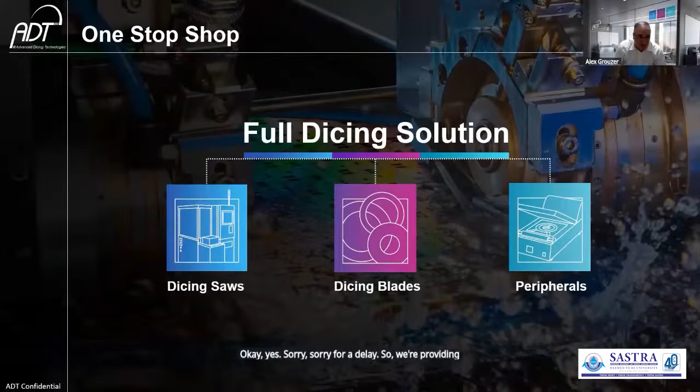Advanced Dicing Technologies, we call it ADT, is a world-leading manufacturer of comprehensive solutions for composite dicing applications. Within over 50 years, few decades, ADT serves the semiconductors, microelectronics, and optical components industries. We're providing full dicing solutions, manufacturing dicing saws, dicing blades, and peripherals.

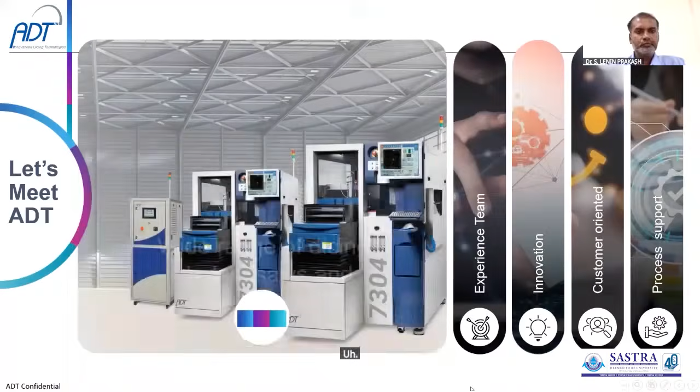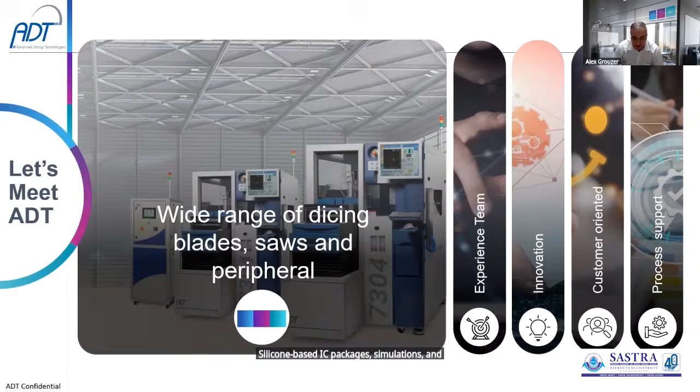Let's meet ADT, who we are. ADT is specialized in the development and manufacture of dicing blades, saws, and peripherals for a wide variety of applications: silicon-based IC, packages, singulations, and hard materials microelectronics components. We have knowledge of more than over 50 years, formerly based on K&S that lived in Israel, and after that ADT was established in 2003. So we have vast experience in dicing technology, building dicing machines, dicers, and peripheral devices, as well as dicing diamond blades.

We are not a huge company. What I'm proud to say is that ADT is a company where innovation never stops. We provide tailor-made solutions according to customer requests. We are a very adjustable company, so we have a lot of solutions for different applications around the world. I call our company a tailor-made company, tailor-made solutions. We are 100% customer-oriented. We can hear our customers and provide our own solutions for that. ADT is a one-stop shop with end-to-end research, development, and production held in the company's advanced ISO 9000 and 14000 environment-certified facilities.

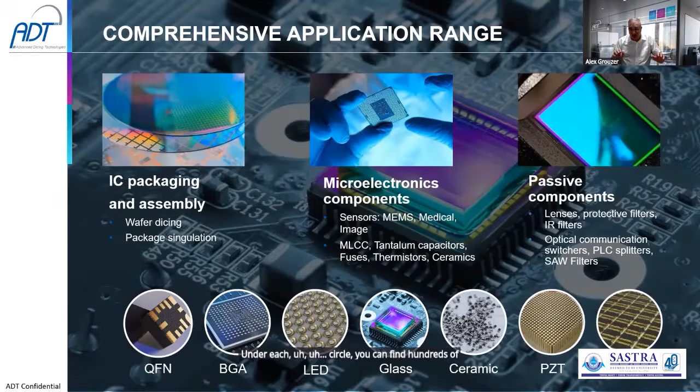Comprehensive application solutions. We are focusing on packaging and assembly materials, wafer dicing, package singulation, microelectronics components like sensors, medical image details, MLCC, tantalum capacitors, fuses, ceramics, etc. So passive components like lenses, IR filters, and all optical components and filters. Here in the line, you can see just a few samples of substrates which we are specialized in dicing there: QFN, BGA, LED, glass, ceramics, PZT, PCB. So under each circle, you can find hundreds of applications and hundreds of solutions with our own solutions.

ADT dicing saw lines offer a variety of capabilities, configurations, and levels of automation, as well as unique solutions for special materials and applications. The dicing saw range includes automatic saws, fully automatic saws with single and double spindles, as well as special machines for tailor-made applications.

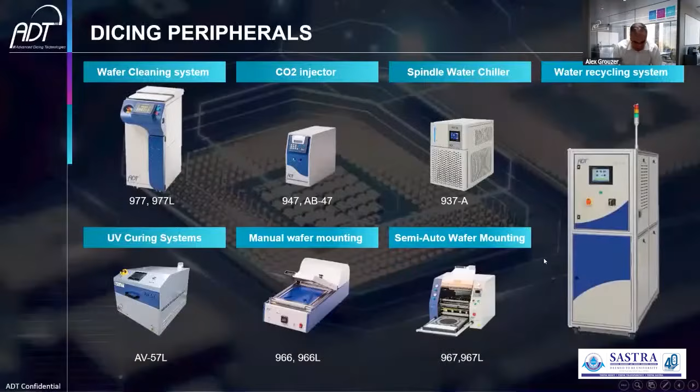About dicing peripherals: ADT offers dicing peripheral equipment and accessories such as wafer cleaning systems, water recycling systems, spindle water chillers, semi-auto wafer mounting, and more. All peripheral devices are part of the dicing process. It's very important to find suitable equipment for dicing. Finally, you get the components which we need to cut, but all the equipment shown here supports the process.

And dicing blades. ADT's high quality diamond dicing blade range includes resin blades, metal sinter blades, nickel blades, and hub blades. So we have 4 main lines. Supporting ever-growing customer requirements, ADT blades are the perfect dicing solution for various materials and substrates such as QFN, BGA, ceramic, glass, quartz, etc., and for other tailor-made solutions for challenging materials and applications.

We have two main divisions at our facility in Israel, for equipment and for blades. I represent dicing consumables, and just to finalize, I want to show you a short movie about ADT, which we present around the world at exhibitions. Please see the movie.

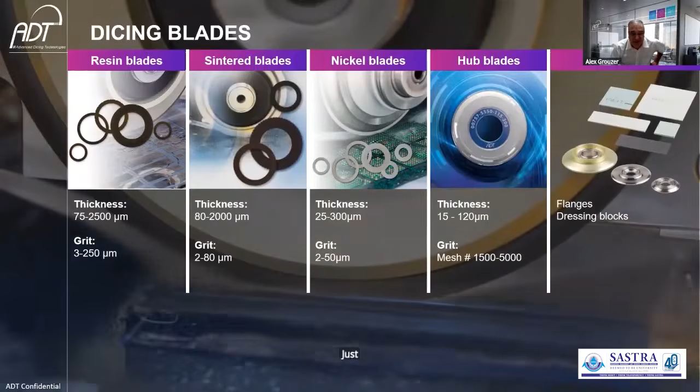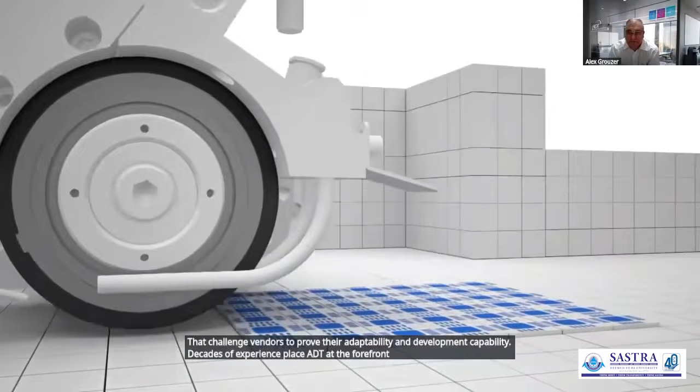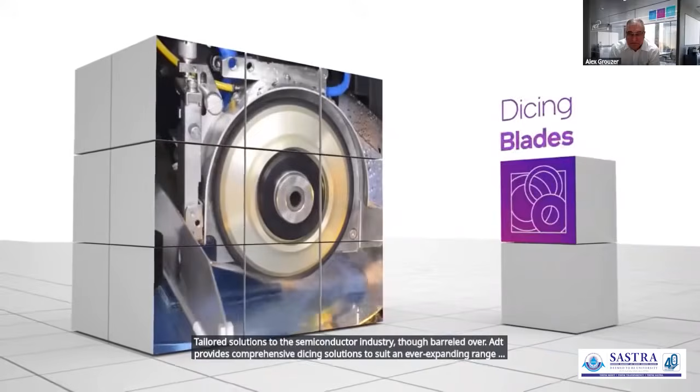We live in a world of constant evolution that challenges vendors to prove their adaptability and development capability. Decades of experience place ADT at the forefront of global high tech, providing unique, tailored solutions to the semiconductor industry the world over. ADT provides comprehensive dicing solutions to suit an ever-expanding range of customer requirements. ADT's international headquarters in northern Israel is the site of our two main production facilities, as well as the home of our global marketing, sales, logistics, R&D, and maintenance and technical support team. Complementing these teams are regional sales and technical support offices in Taiwan, the Philippines, and on the east and west coasts of the United States, as well as a worldwide network of sales agents, representatives, and distributors in the United States, Europe, and Asia. ADT, Advanced Dicing Technologies.

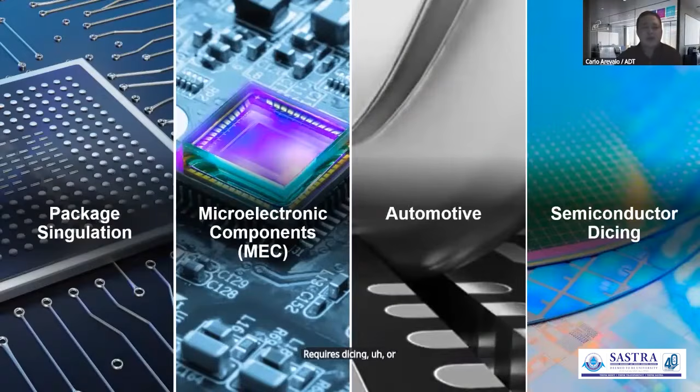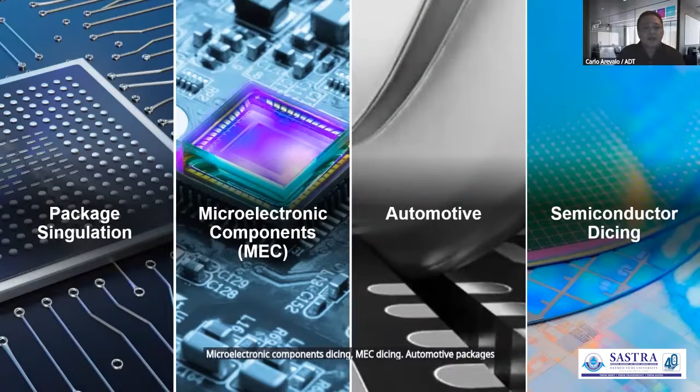Continuing from what Alex mentioned earlier, I would like to talk to you about the different applications and the different packages that require diamond dicing blades in semiconductor or MEC manufacturing. These are the four major processes or applications that require dicing blades and equipment: package singulation, microelectronic components dicing or MEC dicing, automotive packages dicing, and semiconductor dicing.

Okay, talking about package singulation, there are basically about 4 major volume runners currently in the industry of semiconductors or MEC assembly. That would be QFN, BGA, LTCC, and LED packaging.

Let's talk about QFN. QFN being a packaging consisting of a molded copper lead frame. This material is somehow very unique because it's a combination of two distinct opposite materials. Copper lead frame being a very ductile or very malleable material, combining it with a very brittle epoxy compound, then there are a few challenges that are required from the blade or from the dicing process.

Some of the things that are giving challenges to this particular package is the plating of each of the QFN packaging. There is specifically tin plating in the process, or also nickel palladium plating, which is giving so much problems to the blade. So it's very important to have the right amount of balance of wearing of the blade to provide good quality and to provide a significant amount of blade life.

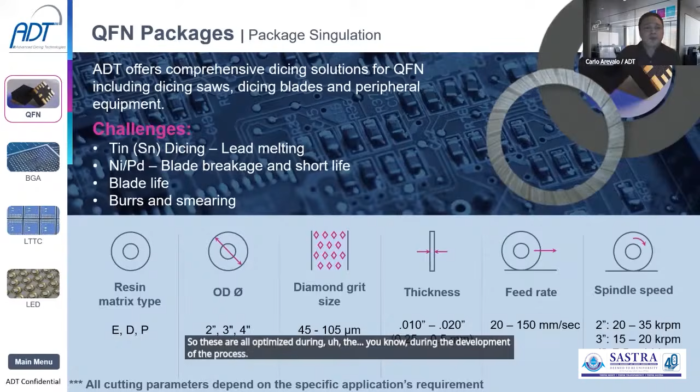Next to QFN is BGA. This is mainly molded PCB, so it's considerably a soft substrate. So the main challenge is to have a blade that would be able to deliver a long blade life. To achieve such a long blade life, you need to maintain the thickness of the blade, or what they call the lateral wear of the blade, to have a good balance with the radial wear. That would maintain the package size during the package singulation.

And another thing is the chippings, because PCB copper traces are very susceptible to peel-offs. So the optimal grit size and a combination of a lot of blade parameters is important to come up with the best matrix or the best formulation.

For this particular application of BGA packages, ADT has a few models also, but it's mainly concentrated on the metal sintered blade. The OD can range from all sizes, from 2, 3, 4, and 5. Diamond grit size from 20 to 70. Thickness range of 100 to as thick as 2 mm is also available.

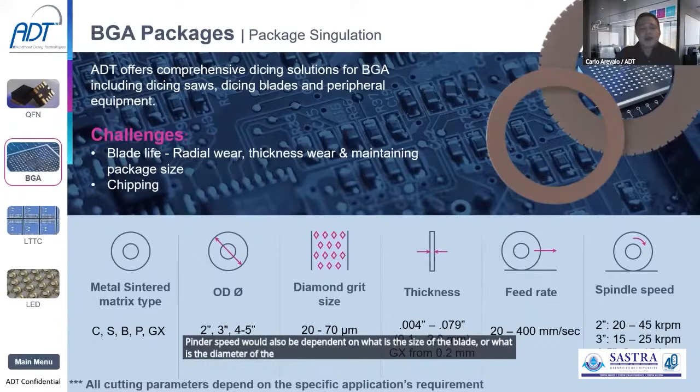Still within the BGA packaging, there's another blade that we are also serving the market with. We call this the Novus blade. This blade in particular is a very durable blade. This was developed to be strong, to be very stiff, and to reduce the risk of breakages and bendings.

So the main importance of this blade is to support high-speed cutting, even if you require a very long exposure of the blade, I mean the length of the blade. If you require a very long exposure, meaning that you're cutting a thick package, and the requirement is to cut it at a very high speed, then this blade was developed mainly to serve those kinds of challenges.

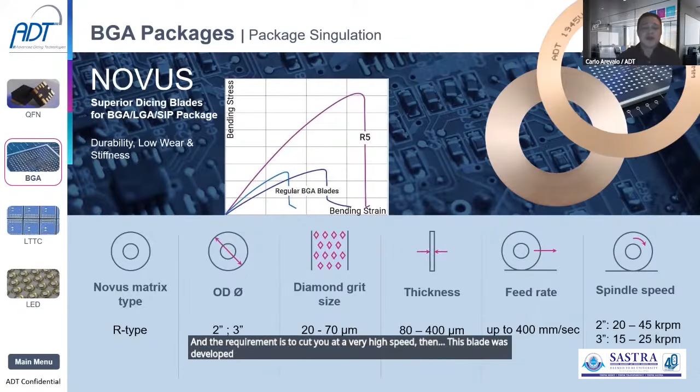Another blade that is also popular, or also one of our special blades in the market, is the S blade. This blade is a combination of maintaining the wear or the shape of the blade while being able to resist loading. The perfect formulation for this blade is to have a balance of lateral and radial wear.

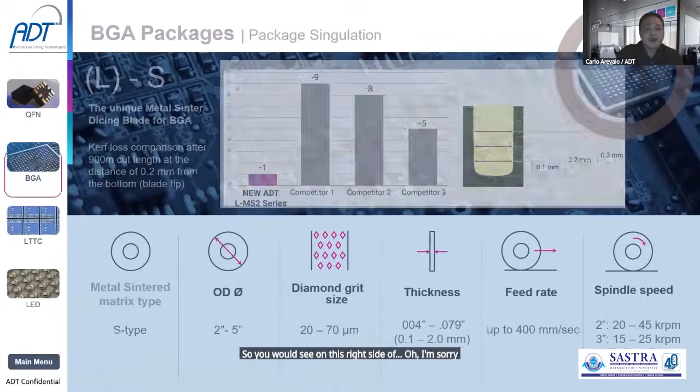So you would see on the right side of this drawing that as the blade is wearing, the profile would have very insignificant change. So this is what you want to maintain in order for your package size to be within the specs or within tolerance, because the main failure for BGA blade applications is the package size going out of spec.

So this S blade also comes in different OD sizes, from 2 to 5 inches. The diamond ranges from 20 to 70 micron. A thickness range of 100 micron to 2 mm is also available. And this blade is expected to run at very high speed, at 400 millimeters per second. The spindle speed will also be dependent on the application, the equipment being used, or the blade OD.

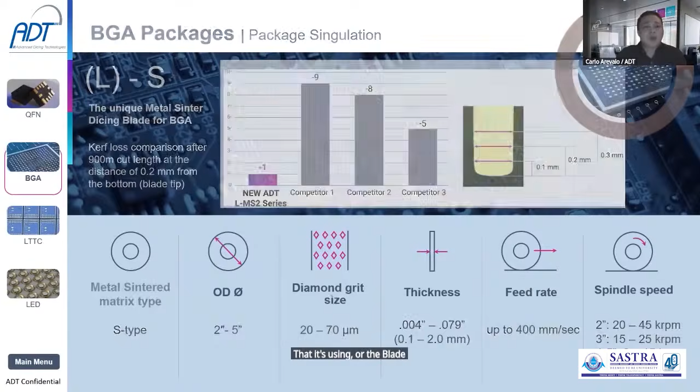Next to BGA application is HTCC or LTCC. These are high and low temperature co-fired ceramic substrates fabricated by laminating individual unfired tapes with printed conductor lines on the surface on top of each other and firing them together in a single step. The main difference between these two types of ceramics is HTCC being more brittle or harder because it's mainly alumina,

but the LTCC is a mixture of alumina and glass. So the challenges for this particular ceramic dicing are mainly concentrated on the chipping, because ceramic is a very brittle and very chippy material. This can cause a lot of chipping if you are not able to optimize your blade parameters or your process parameters. Another issue would be cracks or metal burrs, because this is the natural behavior of the ceramic. It could crack from the top, and also at the bottom.

And also package size, because when you are using a blade to dice a hard material, you're going to lose the side profile or the side thickness of the blade, and it can create an odd shape, and this can cause failure of the package size. So for this particular hard material, normally the recommendation would be using a resin blade because it's a soft blade. ADT has a few models like Q, K, and C matrix.

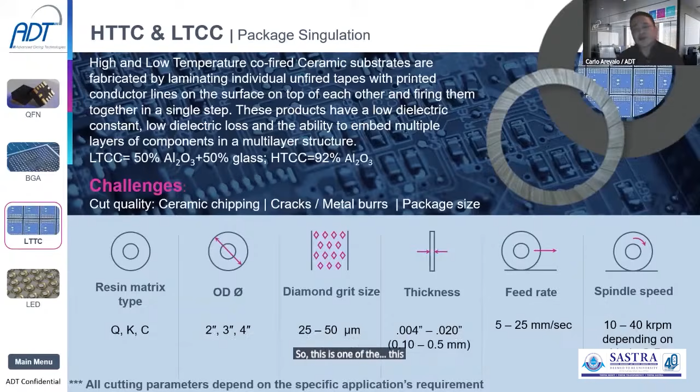The OD sizes range from 2, 3, or 4 inches. Diamond grit sizes from 25 to 50. Thickness range from 100 to 500 micron. The feed rate is relatively slow because of the application in ceramic, so it could range only from 5 to as fast as 25 millimeters per second. And spindle speed, depending on what blade you are using, will range from 10 to 40. So this is one of the few challenging applications for blades, ceramic materials.

And next, more popular in the market, is LED packaging. LED packaging usually consists of a base substrate upon which the LEDs are mounted. There are a few common base substrates used in the market: ceramic, PCB, and a molded lead frame is also a popular substrate. One of the challenges we face on this packaging is chipping, because if it's on a ceramic substrate, it will be very susceptible to chipping.

Another thing is cracks, which is also related to a harder type of substrate. Copper burrs, and die size stability, which would be related to how the blade is wearing. If you are losing your thickness, the die size will definitely change. And low blade wear. The customers or the market always expect that you deliver very good blade wear and are able to maintain a significant amount of cost.

So in general, for this particular packaging, the recommendation could either be to use a hard nickel blade when you are using a soft base substrate, or a soft resin blade if the substrate is a hard base substrate.

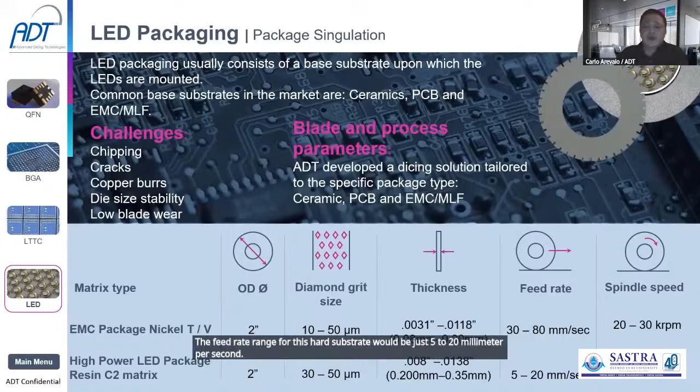When you're dicing a hard LED base substrate, you're going to use a resin soft blade. The diamond grit range will be similar, 30 to 50 micron. Thickness would be within 200 to 350 micron. But if you're cutting a hard base substrate with a resin blade, feed rates are going to be slower than usual. So the feed rate range for this hard substrate would be just 5 to 20 millimeters per second. Spindle speed would be within 20 to 30K RPM.

Then, after the packaging that we discussed for microelectronic components or MEC dicing, there are also a few popular applications or popular materials that require a blade and a dicing process. Those are mainly glass, ceramic, alumina, MLCC, PZT for medical devices, PCB, or SAW devices.

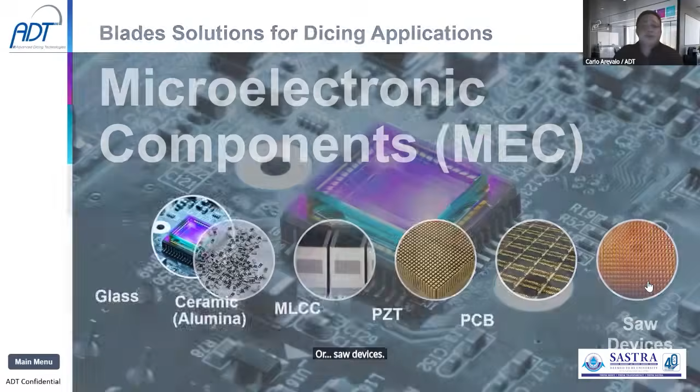If you're dealing with a glass substrate or a glass material, it's a hard and brittle material. There are a lot of applications it's used for: MEMS, biotech, IC or semiconductors, or optical devices as well. So the challenges when you're dealing with a glass substrate are definitely chippings again, top and backside chippings. Cracks are also a possibility because you're dealing with a hard and brittle material. When your material is hard, your blade life or tool life will be low. So this is another challenge: the market is expecting the blade to deliver a good amount of blade life.

Another thing is cut perpendicularity. You need to maintain the straightness. Cut perpendicularity refers to the straightness of the cut line that you make. So for a glass substrate, you have to maintain a very straight line. There are specs for the perpendicularity as well. And in some applications, there are also specs for the cut finish, how smooth or how rough you're leaving the cut line.

So there are two types of blades that are recommended for glass. You could do it with a resin blade, or you could also do it with a sintered metal blade. The grit size would range from 10 to 88 micron, or 10 to 70 if you're using a sintered blade. The thickness range for the resin would be from 75 to 500 micron, and you can go thicker because a sintered blade can support a thicker blade. So if you're using a sintered blade, it's 100 micron to 2 mm.

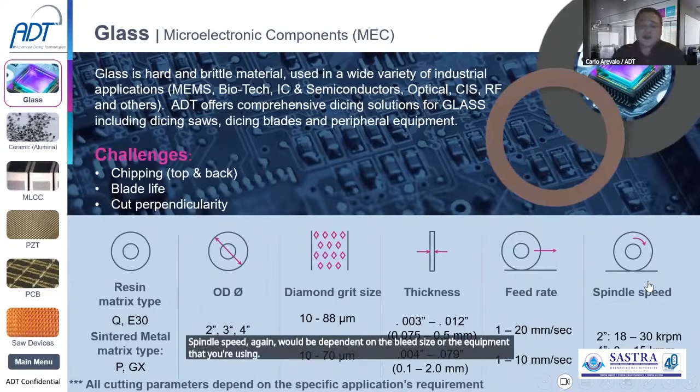But the feed rate is relatively on the low side for these two types of blades. You have a slightly faster feed rate if you're cutting with a resin blade, at 20 mm per second, compared to the sintered blade, which limits you to 10 mm per second. Spindle speed, again, would be dependent on the blade size or the equipment that you're using. So this is also something that needs to be developed.

For MEC, there's similar ceramic and alumina for MEC components, I mean dicing MEC. So it's similar to what I mentioned earlier. You're still dealing with a ceramic or an alumina, a very hard and brittle material. So the same challenges would still face you: chippings, cut straightness or perpendicularity, and short blade life. All three of these need to be optimized or considered in order to define the best blade matrix or formulation. For this type of material, we can use either a resin or a sintered blade, depending on the expected quality outcome.

The OD size can be 2, 3, or 4 inches. For the resin, the diamond grit range can be from 30 to 88 micron. If you're using a sintered, it can be from 10 to 70. Thickness range would be from 100 to 300 micron for the resin, and 100 micron to 2 mm for the sintered blade type. Again, it's similar to what I've shown you earlier. For the cutting feed rate, you would have a slightly faster feed rate using a resin blade, but still relatively low, since the speed can only go up to 20 mm per second. Spindle speed, again, is relative to the blade size and the machine that you're going to dice with.

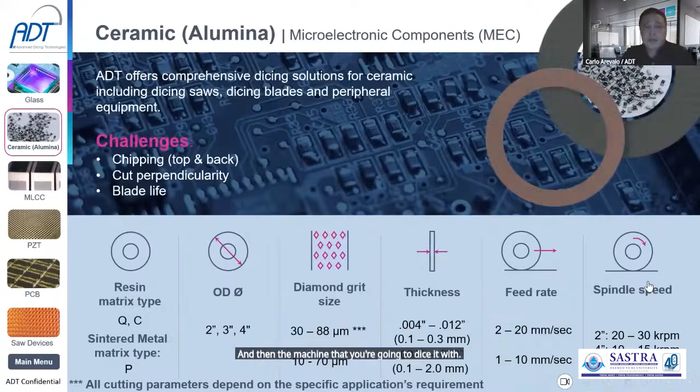Next to the MEC application is MLCC, or what they call the green ceramic. This is a multi-layer, basically a capacitor consisting of two conducting electrodes separated by an insulating dielectric material. Multi-layer ceramic capacitors consist of a large number of closely spaced parallel electrodes within thin layers of high capacitance ceramic material. For the green ceramic, the common application is dry dicing, so there's no coolant or water used during the dicing process. Without this water or coolant, you're dealing with a lot of dicing dust or material dust during the process, and this causes a lot of issues.

This is one of the challenges if you're going to deal with this kind of packaging. Blade clogging is also common because you're not flushing away the waste materials during dicing, and it's going to load up on the blade. It can clog your blade, and it can load up your blade. So when you have a loaded blade or a clogged blade, you would have poor quality in terms of smearing, or if the smearing gets much worse, it can also lead to lead shorting. So these are the few challenges that need to be looked at.

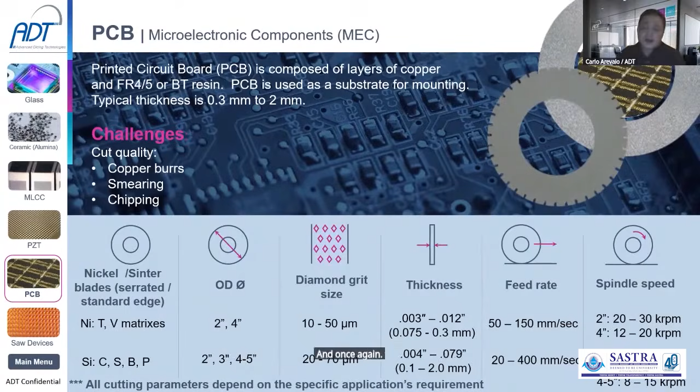And feed rate, since this is a sinter blade, the blade is less likely to go. I mean, in terms of loading, this has lower loading compared to a nickel blade, so a faster cut speed can be applied. And once again, the spindle speed is relevant to what the blade size or equipment this process is set up.

And then for SAW devices, surface acoustic wave devices under MEC components dicing, devices that make use of the ability of piezoelectric materials to convert acoustic waves into electromagnetic signals and vice versa. The SAW band pass filters are the common devices that we support our blades with. The most widely used substrates are quartz, also lithium niobate and lithium tantalate.

So these materials are very brittle. They require a very, very high accuracy. Very tight on chippings and cracks and all of these quality indices. So of course quality. So most of the time, for this particular application, it is well to be used by a resin blade.

So we have a few models that we use for this particular application, mostly 2-inch diameters, because if you're dealing with a very hard or very sensitive type of material, the setup for the exposure has to be minimum, or to be a very balanced blade. So 2-inch is always good for this process.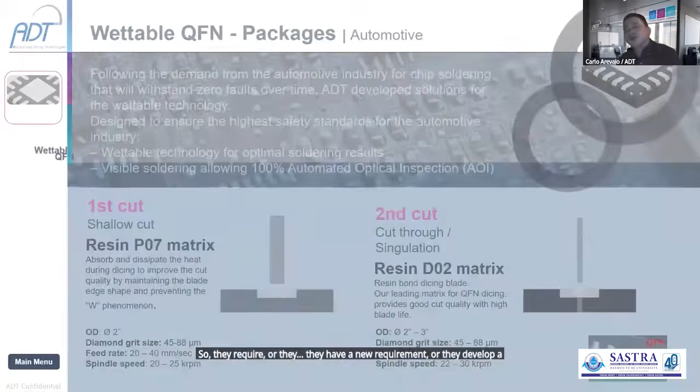So one thing I would like to talk about is wettable QFN, or the automotive packages. The automotive device, for example, is QFN, and there's a requirement for automotive devices to improve solderability or reliability of the solder. So they developed a requirement for a wet QFN process.

Following the demand of the automotive industry for chip soldering that will withstand zero faults over time, we have developed solutions for wettable technology. So the design of this blade is to ensure the highest safety standards for the automotive industry. So wettable technology is a requirement for most of our customers doing automotive packages or devices.

So one of the things that was developed or changed here from the normal QFN process flow was to improve the plating process. I mean, on the left side here, they require a first pass blade with a slightly wider thickness. They require the blade to cut, or shallow cut, through the scribe line, so you develop a certain profile scribe on top of the leads.

After you have gone through this with the first pass, or shallow cut pass, the substrates or lead frames will go again for another plating procedure before they go through a second cut. To your right you will see that it will full cut the unit.

So this is another application. Silicon is the most common material. It is brittle, and the wafers range from 12 inches diameter to 6 and 8 inches, but 8 being the most common. The thickness range for silicon wafers is 200 to 800 micron.

But now the industry is of course improving the density of the dies for each wafer, so the demand for the streets to be very narrow is very common.

So the main issue when you try to recommend a hub blade for a particular narrow scribe line silicon sawing is the kerf width. The normal demand for the kerf width now can go as low as 15 to 20 micron. So this kind of narrow scribe line is very challenging to deliver with a relatively passable amount of chipping,

because chipping size is somehow relative to the grit sizes. So grit sizes in combination with other factors, when creating chip size on a very narrow scribe line, is very problematic. So these are a few of the challenges for the silicon wafer that we currently face in the industry.

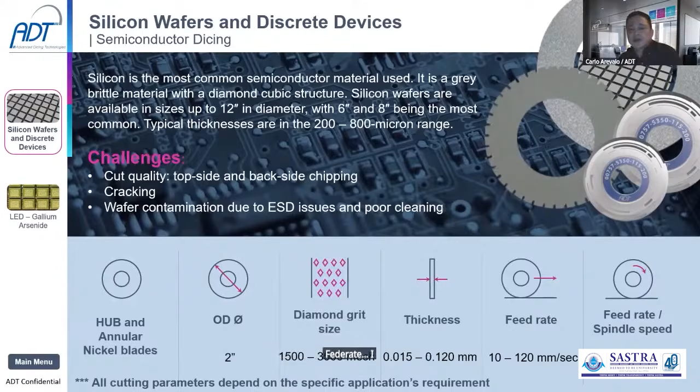Gallium arsenide is a semiconductor material characterized by a direct band gap, which enables it to emit light. So for the LED industry, for LED packaging, they are always developing gallium arsenide wafers.

And the challenges for this particular wafer are the same: top-side and backside chipping, also cracking that can develop because of the structure of how the wafers are made. The backside is also susceptible to backside chipping. And of course, the toxicity of the GaAs dust is important - it's a control that needs to be addressed on the equipment.

So for gallium arsenide, this is an established process for the blade as well. Mainly hub types of blade at 2 inches are common. Diamond grit size can range from 1 to 4 micron, or 3500 to 5000 mesh. Thickness from 15 to 30 micron, or 25 to 120 if using a hubless blade. Feed rate is relatively low, at 1 to 5 mm per second. Spindle speed, again, is dependent on the blade or diameter being used.

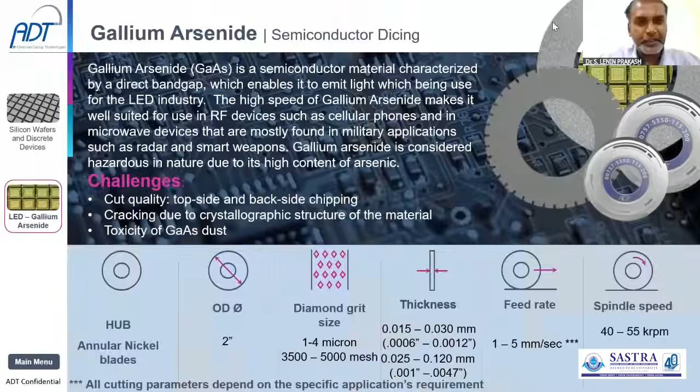Thank you, sir. Thank you. Now, in case you have a few more slides, it's no issue, you can continue, or we have concluded. We have a few more slides, but we should cut. If we have 5-7 minutes more, Carlo will continue. But I know it's more than 4 o'clock, so we can cut.